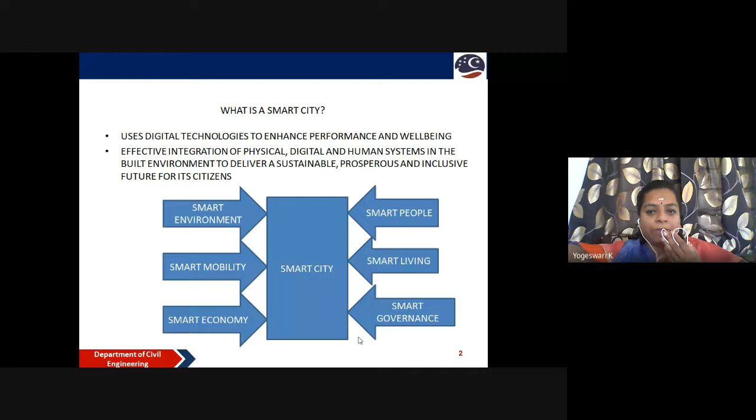Digital becomes very important to use in today's world. Combining this physical, digital and human system in the built environment to deliver a sustainable, prosperous and inclusive future for the citizen - that is when it becomes smart. So a smart city is to have smart people, smart living, smart governance, smart economy, smart mobility and smart environment. With all these things, you can make a city smart.

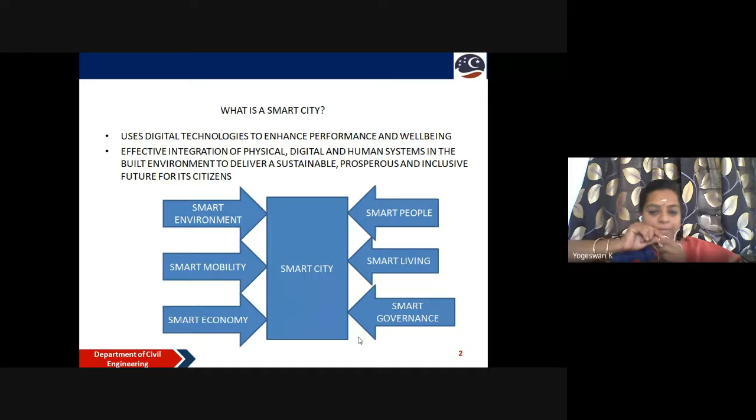So before entering, why do you require smart? Let us see some statistics about India. India's area is around 3.287 million square kilometers, and its population is 1.343 billion. China's area is 9.597 million square kilometers, and its population is 1.410 billion. The USA's area is 9.834 million square kilometers, but its population is only 325 million. So even though China has the number one population in the world, its area is quite large and the population is distributed widely. When you look at the USA, the population is very less compared to the area. But when you look at India, the population is very high compared to the area. That is why India is becoming a smart city.

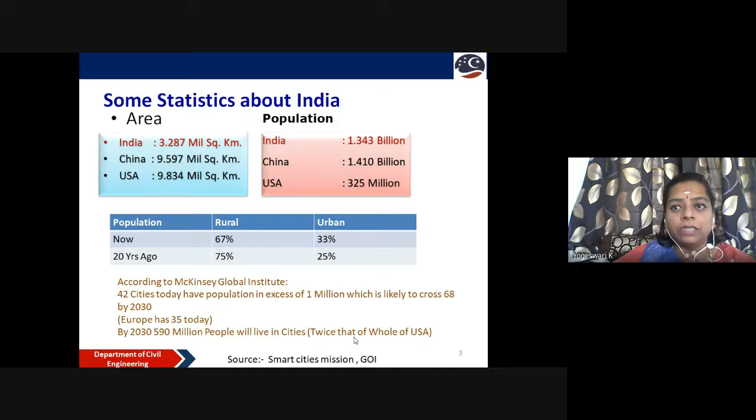But in order to face this challenge, it is very important to think smart. Throughout the world, the rural is also currently converting into urban on its own, by giving more infrastructure to it. So it's not just that people migrate to urban - the upgradation of rural to urban is also happening. A rural place which was a village ten years ago has now become a bigger town. So the upgradation is also happening. Hence it is very important to think smart in supporting people with all types of infrastructure.

So these are all some statistics with respect to water supply, sewage, solid waste, private transportation, rail-based mass transit, and affordable housing, where the basic service demand is very, very high compared to supply.

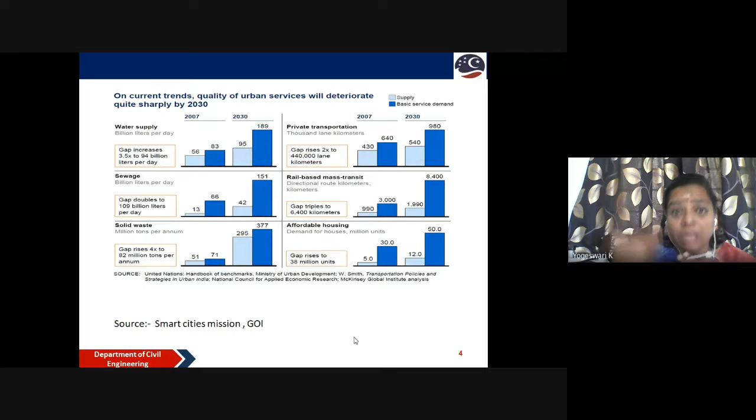We have a very less amount of supply of water supply, sewage, solid waste, but the demand is keep on increasing, and the demand will in future also increase. So for this, we have to design our infrastructure to be very smart.

The objective of Smart City Mission is to promote cities that provide core infrastructure and give a decent quality of life to its citizens, a clean and sustainable environment, and the application of smart solutions. Whenever you want to provide core infrastructure to make a sustainable life, you have to make sure the solution is very smart, and this solution has to be an inclusive development focused on sustainability. So there are two types of smart city mission.

How can you make a city smart? The city has already developed, already grown to a very large extent. In that case, if it is an open area or a new area where the city has to be developed, you can develop it by creating new space, new applications, and all. That is one type. Another type is developing an already developed area step by step.

Another approach is I will not try to make the entire city smart, but any one infrastructure I will make smart. For example, in a commercial hub where I find more traffic, I make smart transportation alone applicable for that particular area.

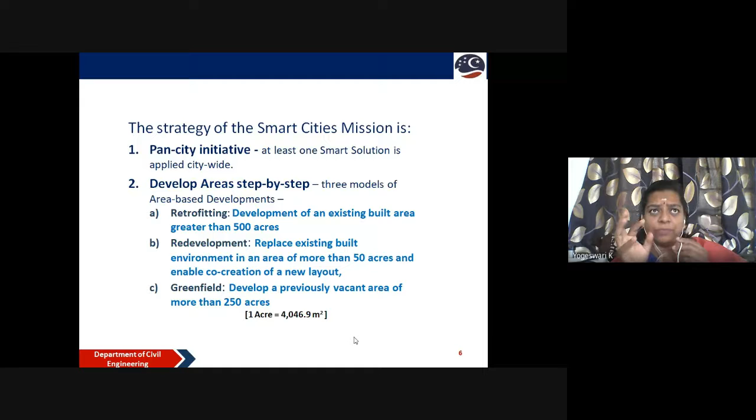So you can make either one infrastructure smart, or make the entire area smart - that is the Pan City Initiative or developing the area step by step. The smart city features include promoting mixed land use in area development. For example, at the lower ground you can have commercial, at the first and second floor level institutional, and at the third and fourth level residential.

Creating walkable localities to reduce congestion, air pollution, and resource depletion, boost the local economy, promote interaction, and ensure security. Today you would have seen many smart cities in this corona period, where people are working from home, using very less transport, so congestion is reduced.

This is possible because of the digital effect we have. Digital has now been implemented in the entire educational system because of this pandemic situation. Because of this, you reduce traffic congestion, and because of reducing congestion, your air is cleaned, there is no pollution in the air, and the usage of petrol and diesel was very less.

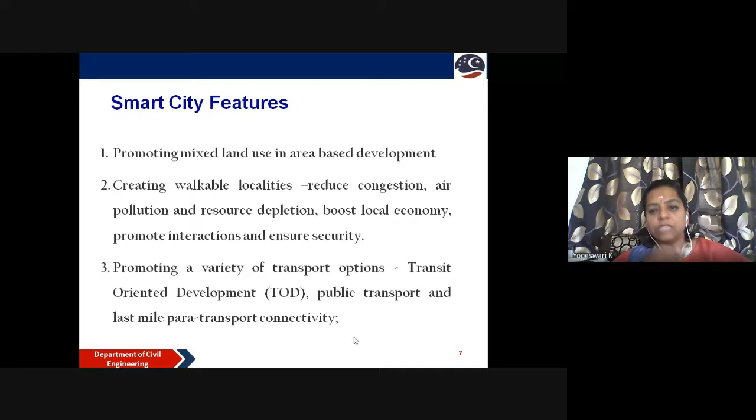So, providing variety of transport options is another important smart city feature, that is transit oriented development, public transport, and para transport connectivity. This is also happening, where even in the transport side, a large amount of smart city features have been taken.

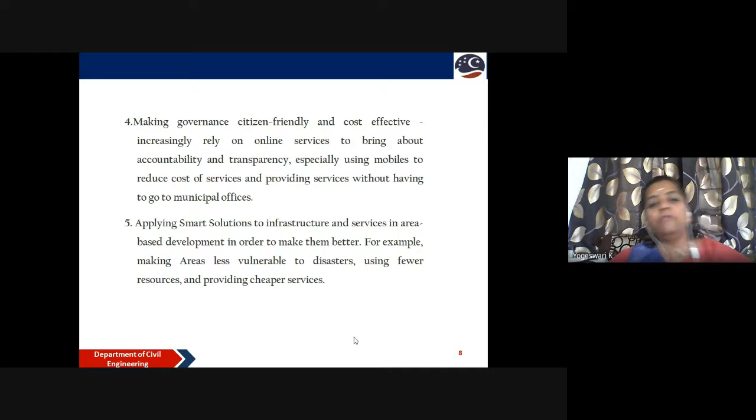And governance - today everything is being done with a mobile. So if your area is not clean, you can just go to your Google app, type your area and find your municipality, and complain online. So it's governance that is cost effective and transparent, using your mobile, without directly going in contact with the municipal office.

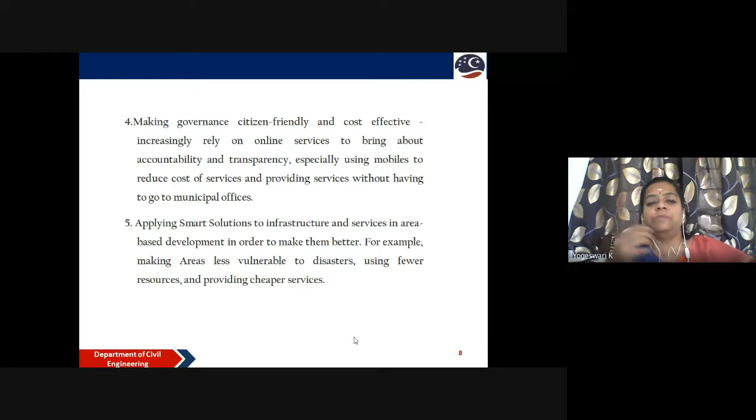You also provide a large amount of smart solutions to infrastructure, services and area based development in order to make them better, for example making areas less vulnerable to disasters. People have been informed previously with forecasting regarding rain, cyclones, or other predictions, given to the public immediately in order to reduce vulnerability, using fewer resources and providing cheaper service.

So what are some pan city smart solutions? We have pan city smart solutions in each and every infrastructure. For example, in e-governance or citizen services, you have public information, grievance redressal, electronic service delivery, citizen engagement, and city eyes and ears. The cameras fitted throughout the cities are called city eyes, fitted with sensors, so you can hear what people speak near that camera - that's city eyes and ears.

Video crime monitoring - nowadays the police, as you would have seen in many newspapers, carry out many investigations using video footage taken in that place. People immediately trace the criminals and then monitor them. If any crime is happening, police personnel also monitor through video surveillance.

Coming to waste management, today waste is no longer just waste - it is usable, reusable material. So waste to energy, waste to fuel, waste to wealth, waste to compost, wastewater to be treated, recycling and reduction - these are some of the solutions in waste management.

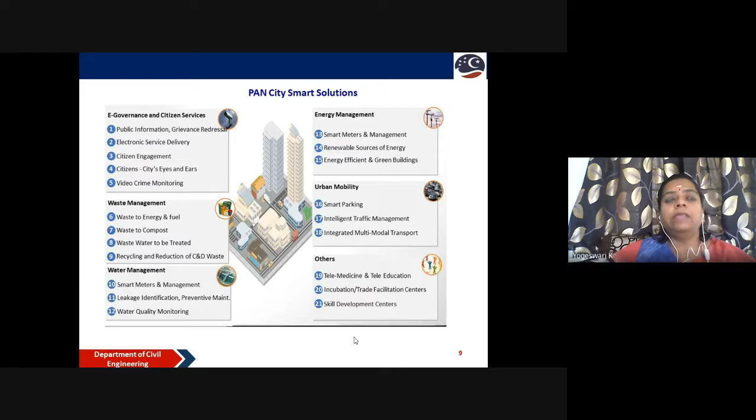In energy management, people use smart meters and manage renewable resources of energy, energy efficient and green buildings. Coming to urban mobility, smart parking, intelligent traffic management, integrated multimodal transport can be used - these are some smart solutions.

And today, the most important are telemedicine, tele-education, incubation centers, skill development centers - these are other pan city smart solutions. So in pan city, you can either take e-governance for a particular area and try to make everything digital, or take water management or waste management alone, transport alone, or energy management alone to be smart in that area.

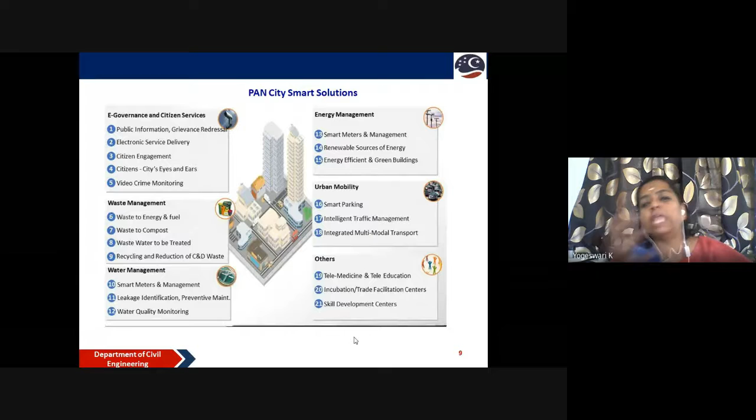So you can choose any one of these infrastructures and apply it to that area. There are 6 key elements to be created as part of smart infrastructure.

In order to make a city smart, there are certain things which are very important to be done. These are the key elements required for making a particular smart infrastructure. The first is the smart city operation center, a control command center which controls and commands the entire smart infrastructure of your city.

You should have a very good Wi-Fi condition. Environmental sensors are required. You need a PA system for announcements, an emergency box setup for getting input data, and a variable messaging system where you can broadcast informative messages and give alerts and city updates. So these are the 6 important elements required: command control center, Wi-Fi spots, environmental sensor, PA system, emergency box, and variable messaging.

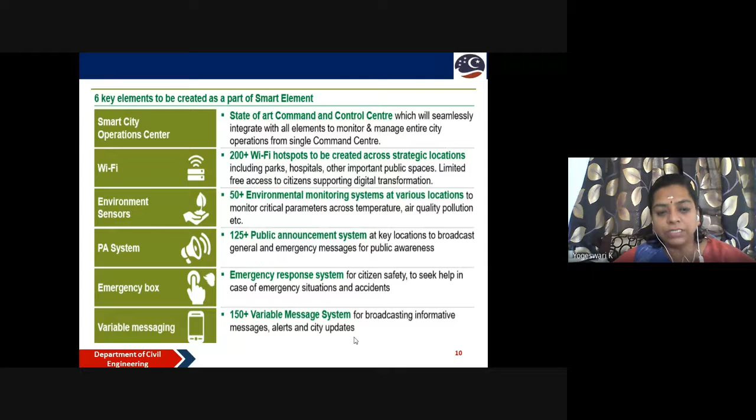Now let us see some smart city, smart pan city initiatives. For example, if I want to create an emergency response system: there is some accident happening, there is a flood related issue going to cross the bridge portion, heavy flood coming in crossing the bridge, or there is heavy traffic happening in a particular area.

Or the pollution level is getting high. For example, in Delhi during January or February, there is a huge amount of air pollution, fog, and mist formation, so people are requested not to come out of their houses or even open their doors and windows. This can be predicted by the environmental sensor and immediately given to the people through the variable messaging text method, so people try to stay back at home.

These are some of the sensors used for the emergency response system: the environmental sensor, the flood detection sensor, the traffic sensor, and the CCTV camera, in order to identify any emergency. For example, if there is an accident, and there is footage coverage, then immediately that sensor attached to it will respond, giving information to the ambulance which is at a very near spot to come.

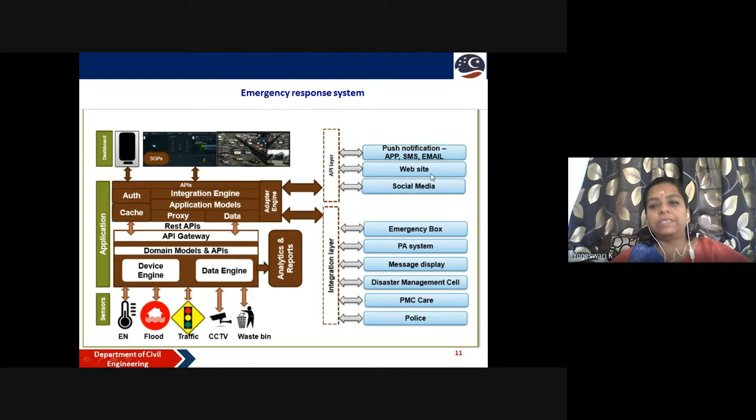This is what is very important in smart infrastructure. For example, once the sensor identifies something, it is taken care of by either police, PMC care, or disaster management. Then immediately it goes to the message display, the PA system, and the emergency box to announce. Then, during the live session itself or after completion, it is given to social media, websites, and finally to SMS or email through the various API layers.

Coming to smart traffic management systems, the various highlights include license plate number detection, which is very important. Suppose a particular vehicle crosses the signal, deviating from it; there will be a sensor fitted to the signal which takes a photo of the number plate. It will immediately detect who is the owner of the vehicle, their address, and all that information, then send a message to the detected person.

So you can have license plate detection to identify stolen or suspected vehicles. Nowadays many stolen vehicles are identified through camera footage. Sometimes they suspect a vehicle and certain sensors identify the goods inside. There's also over-speed detection up to 150 kilometers per hour happening in many places in India. When you cross a particular signal or road, a sensor detects and tells you if you are moving at a speed of more than 150 kilometers per hour.

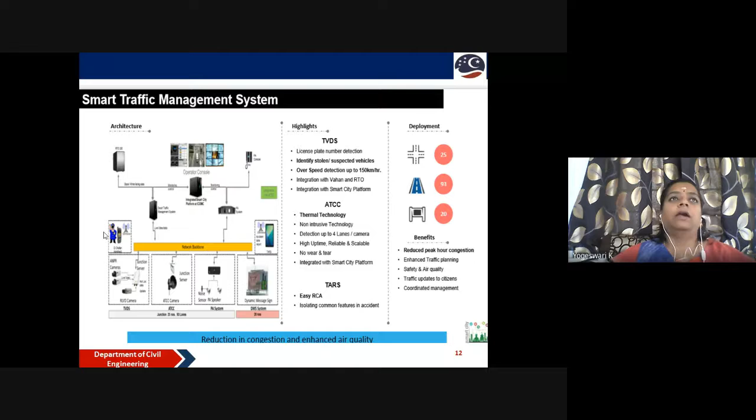Integration with Vahan and RTO. Whenever you buy a vehicle, your vehicle number, registration, everything has to be related to the regional transport office, and this RTO will give you the entire information. So there should be a link between your Vahan and the RTO system, which is being integrated during the purchase of your vehicle itself.

This is done because of smart traffic management and integration with the smart city platform. So you require the entire movement of the vehicle, where it is moving, where it is going, and identify those vehicles, and whether there is more vehicle coming to a particular road, so whether there is a need for change in the signals. Everything can be managed in the smart management system.

ATCC is the Advanced Traffic Control System, where you have thermal technology, non-intrusive technology, detection up to 4 lanes, and camera. So you can find out what is coming in all the 4 lanes, and it is highly reliable and scalable. There is no wear and tear of these sensors integrated with the smart city platform. These are some of the smart benefits of this.

So you take an input in terms of camera, you take an input in terms of the advanced traffic controller system, and you take input in terms of the smart sensor or a dynamic message display. Once you do your analysis, you finally give it out as messages, or display it on the screen, or it can be given to the public.

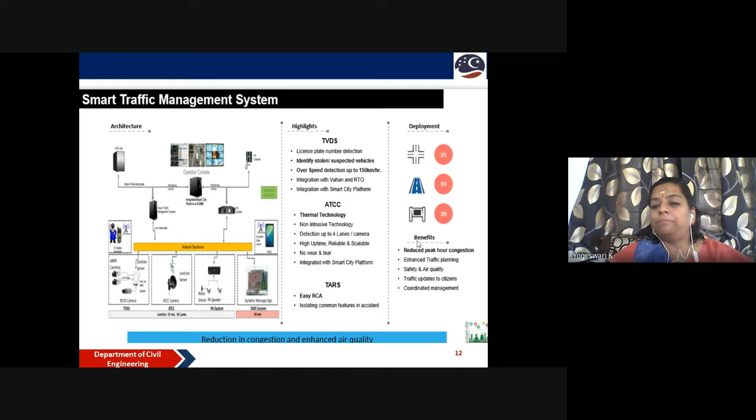So the various benefits are: you reduce peak hour congestion, enhance traffic planning, safety and air quality are enhanced, traffic updates are given to the citizens, and coordinated management is done. Smart traffic management system, this is also happening today.

And if you go to your municipality, like one of my students did this smart tracking management system. What she did is she fit a sensor in the dustbin. So once the dustbin is filled up, it will give an intimation to the municipal office that in this particular road, this particular number of dustbin is filled, and immediately from the municipal office it will give the message to the lorry drivers or truck drivers.

It will say who is nearest on that route, giving information and spot details in order to clear that waste dustbin. So all this information is done digitally without any manual intervention. The sensor identifies there is filling in the dustbin, and immediately it goes to the municipality, finding out who is nearest using GIS technology.

It finds out where the nearest truck is available, and from that truck it gives the information to the driver to go and pick it up, and then it is solved. So the entire thing is being done digitally.

This can also be done for any tracking. You can track any type of vehicle like ambulance, fire service, buses, anything. So AVL tracking and scheduling can be done, and incident management, harsh braking, route violation, speed violation, or a panic button can be handled.

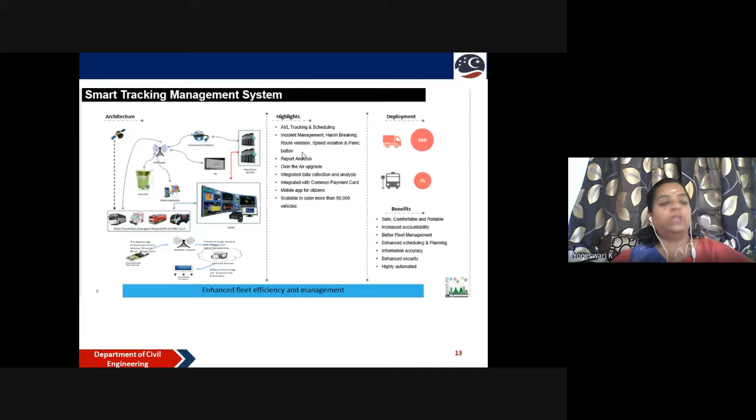So you pay everything in terms of payment, you pay fines using a card. Once the message is sent to the people, they have to immediately pay the fine using the digital card. It also gives various benefits: comfortable and reliable, increased accountability, better fleet management, enhanced scheduling and planning, information accuracy, enhanced security, and highly automated.

Coming to the smart parking management system, you would have experienced this on your own when you go to the various malls. Before getting into a big mall, you will be asked to go to A2, that is A block second floor, or C block third floor. Likewise, you have been given a particular place, so your parking space, once you enter into a parking lot itself, is fixed.

So you don't waste your time finding the parking lot, you just go to your allotted lot and park your vehicle. This can be done, and at the same time the cost required for parking is also managed. The time of parking when you move out, the total parking time you took, you are being charged accordingly.

So all this is done using sensors. The sensor will try to pick out the vehicle and allot a space, and at the same time it will also give all the other information. It is a maximum wireless system, supports all weather conditions, fully automated parking areas, real-time parking availability, and advanced information and guidance is provided.

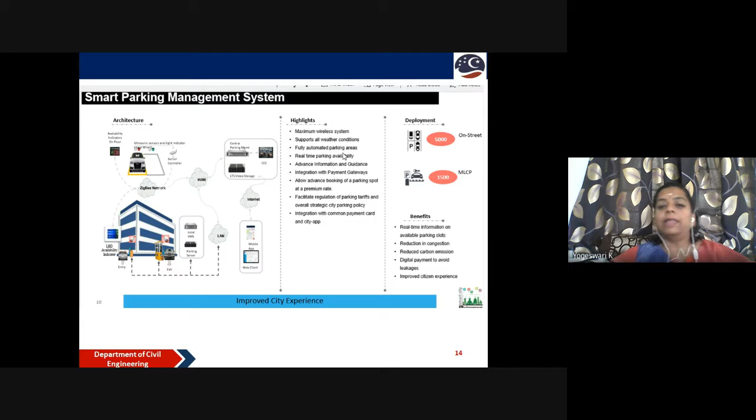Integration with the payment gateway allows advance booking of a parking lot at a premium rate, facilitating regulation of parking tariffs and overall strategic city parking policy, with integration with common payment cards and the city app. The benefits include real-time information about parking slots, reduction in congestion, reduced carbon emission, digital payment to avoid leakages, and improved citizen experience.

Now we will see the area-based development. So till now I have shown this.

Yes, yes. Can you able to hear me? Any queries? Is there any queries? Can I proceed? Okay.

Now, till now I have spoken to you regarding the Pan City initiative. Now I will be speaking about the entire area-based development master plan. So how can I make this? If you go for Pan City, I concentrate only on one particular infrastructure alone, and I try to implement that infrastructure alone to make it digital using digital knowledge.

But when going for the entire area-based development, I have to integrate many infrastructures with a single data unit, that is, the data is one. The population in that area is the same. I don't want to repeat that for each and every infrastructure.

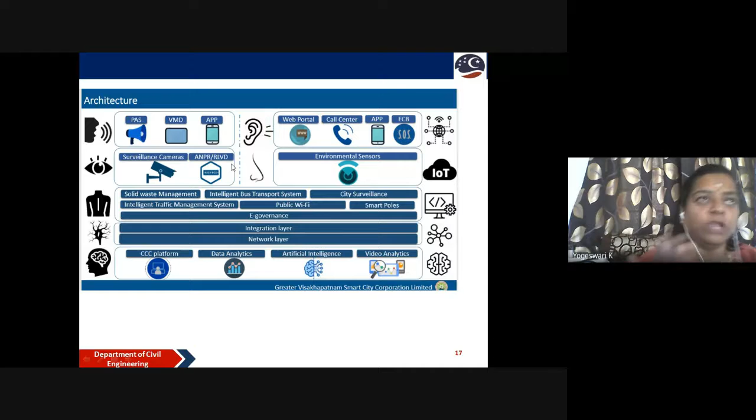Once you've done this with the 4 inputs required for your body, you take input through either voice, ears, eyes, or nose, and then put it into your body. Your body is your infrastructure. As far as the city is concerned, you put it into solid waste management or intelligent bus transport, city surveillance, traffic system, public Wi-Fi, and smart pole. Your nervous system or blood vessels act as an integration layer.

It takes the data and sends it to every point - to lungs, to heart, to your stomach. Similarly, the data goes to solid waste management, intelligent transport system, or intelligent traffic system. And finally, your brain is your control command center.

Your control command center controls the entire platform, gets the data analysis, applies artificial intelligence, works out solutions for any problem, and gives out analytics. So these are the basic architecture elements required for any smart city.

In a smart city, you require cloud sources or IoT, Internet of Things. You require digital knowledge, neural networks, and artificial intelligence. These are the various technologies required for any infrastructure upgrade. So it is no longer true that a civil engineer is just a civil engineer thinking of physical infrastructure alone. It is very important for a civil engineer to enhance his knowledge in digital IoT technique also.

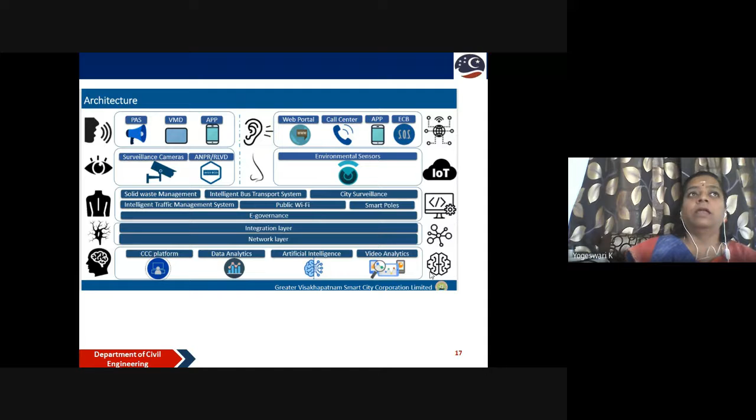As a civil engineer, I would request all students to enhance their knowledge in digital-based civil engineering also. Coming to this, one of the important multi-utility platforms - now I will show you some case studies where they have enhanced the smart city.

This is called a smart pole. When you look at this pole, you can see various elements attached to a single pole. There is a telecom antenna which receives the signal for all your mobiles. You can see a street light, called an LED light, for energy efficiency. You can see a camera here, used for a Wi-Fi spot.

So Wi-Fi spots for a digital city. There are cameras used for surveillance, and some advertisement boards which display or give messages to the people. There is a public address system, PAS system, for connectivity of the city. There are environmental sensors fitted to this pole in order to find out the pollution level, air quality level, and all those things.

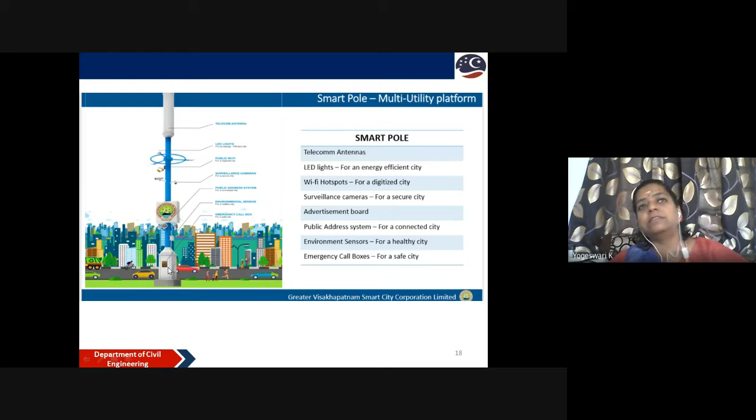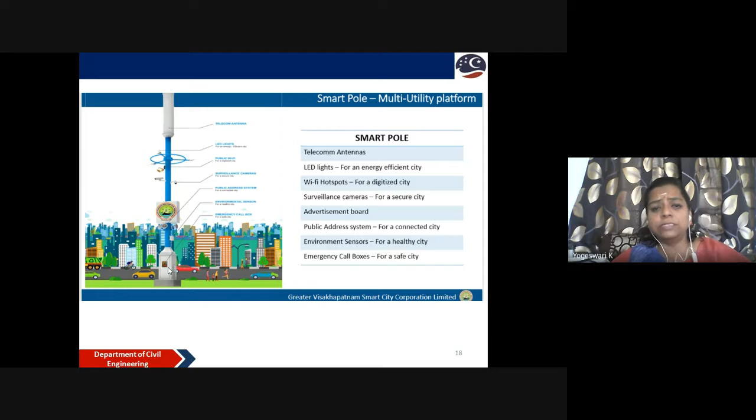And there is an emergency call box for safety. For example, if there is an accident, people just come and press that button and say there is an accident. Immediately the sensor will identify the data and send it to the nearest ambulance, making the ambulance come to the spot quickly. So you can see this is a closer view of the smart pole, where the environmental sensor is fitted.

So it is a real-time pollution monitoring system which gives the temperature, humidity, lux index, noise level, and all those things. You can monitor the carbon dioxide, nitrogen dioxide, sulfur dioxide levels, and also find real-time dissemination to the citizen. In future, it is scalable for PAN City, extended to the waterlogging sensor, real-time correlation, and open data platform.

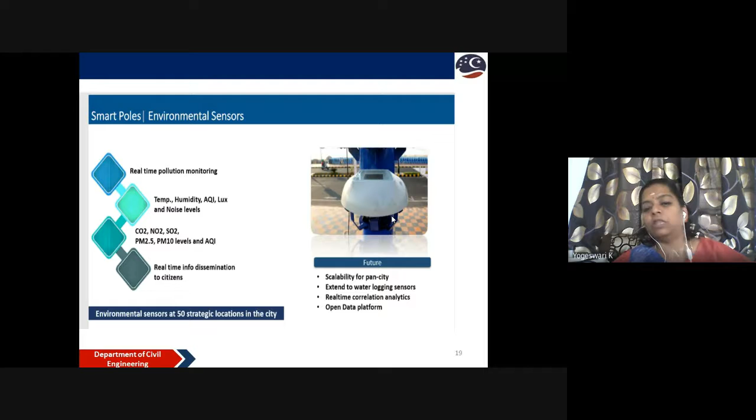So the smart poles have a public address system on all four sides, where you deliver a pre-recorded message to address the people as a whole. Nowadays, during the Corona period, in a commercial hub you can see police using this public address system to tell people not to move in a close manner.

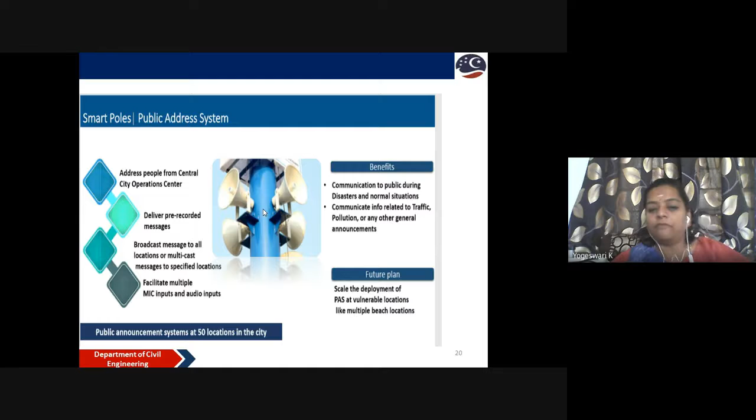For example, there is a person walking on the road who has been given a dog bite. A dog has bitten him. So there are three options for him: either he can dial directly to the contact center from his mobile, or he can use the SOS mobile app, where he just clicks and says he is in an emergency situation.

Or he can call from that emergency call box if he is very close to the road and there is a smart pole with an emergency call box - even if he doesn't have his mobile at that time, he can click the emergency call box. Immediately it will connect to the call taker, who will register his details and complaints - where he is, what happened to him, everything.

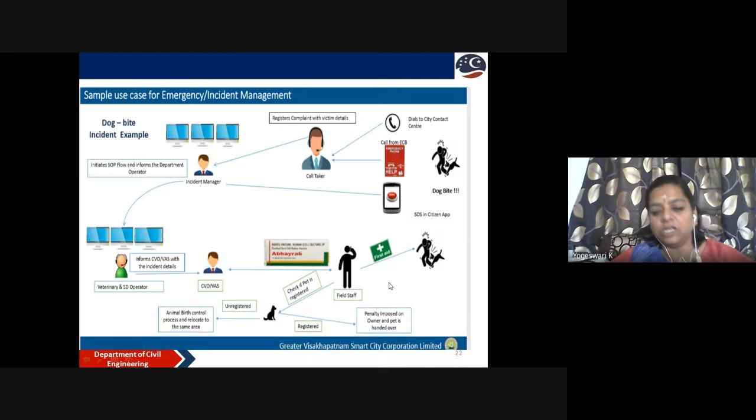So the people can also be contacted. The man and the dog are not moving from the place, they are still in the same place, but other things are happening around them, and immediately a solution is given. This is a simple case for emergency and incident management. You can feel now that your city becomes smart without anybody's help, automatically you get your solution for that.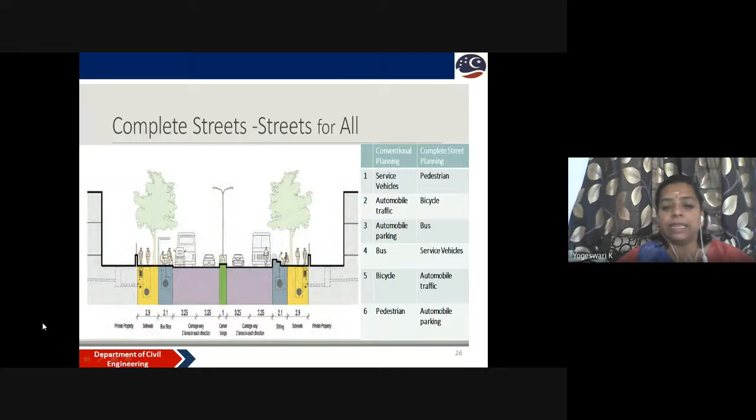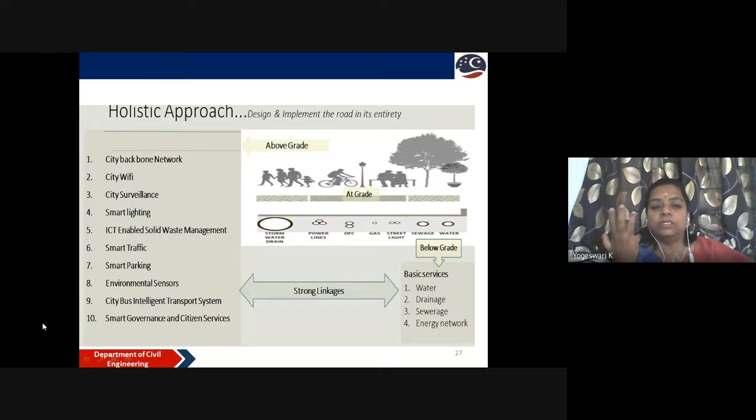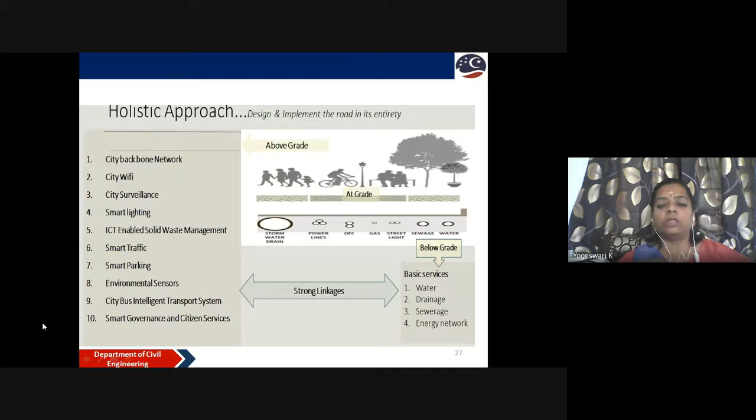Below the street, you can see there is a stormwater drain, a sewage line, an electricity line - all of these require a place. So a holistic approach is required, needing a city backbone network, city Wi-Fi, city surveillance, smart lighting, ICT-enabled solid waste management, smart traffic, smart parking, environmental sensors, city bus intelligent transport system, and smart governance. Everything has to be provided on a particular road, along with basic services like water, drainage, sewage, and the energy network below the roads.

Various design elements are required: smart street furniture and signage, public utilities, bays and on-street parking, smart street poles, median and its beautification, barrier-free and uniform footpath and bicycle lanes, road signage, street vending, carriageway, and utility ducts.

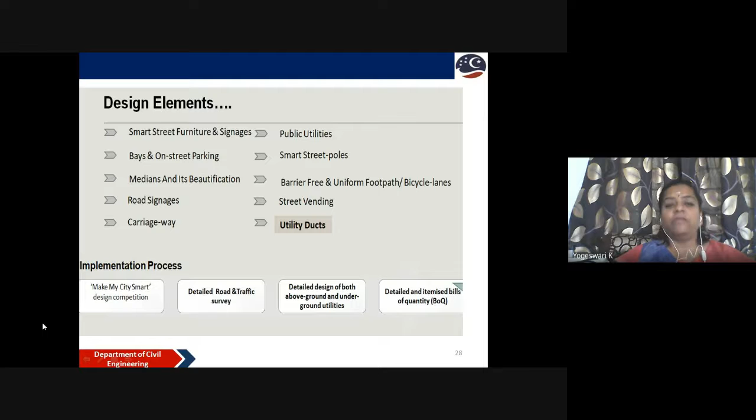So you can see underground utilities on the roadbed, adjacent to the roadbed on either side, and utilities in an underground corridor. When you go to Ahmedabad's GIFT City, you will find the third option, where there is an underground tunnel running throughout the city carrying all the utilities. This tunnel can be entered from various points in that area.

Normally in our places, we go for option 2, where utilities are provided on either side of the roadbed. In some places, where there is no space on either side, utilities are provided below the roadbed instead. There are various advantages and disadvantages in both cases.

In case of utilities in the roadbed itself, disadvantages include repairs cause disruption to traffic during repair. The advantages are that it can be done with very less space and reduces construction time.

Option two, utility adjacent to the roadbed, prevents closure of the traffic lane during construction and repair, requires less protection, and reduces the need to acquire land for future expansion. The disadvantage is more space requirement and loss of pedestrian area during repair.

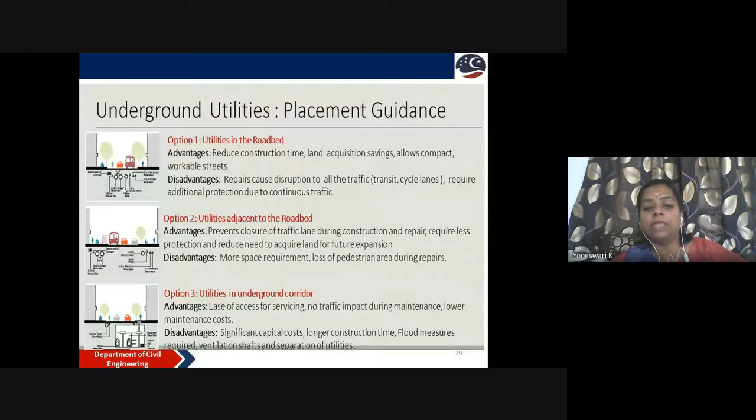So you can see a duct is provided below the road surface, and here you can see various pipelines used for certain things. There are dry ducts and wet ducts. Wet ducts are used for the movement of water supply and sewage. Dry ducts are used for cable lines, OFC, telecommunication lines, and so on.

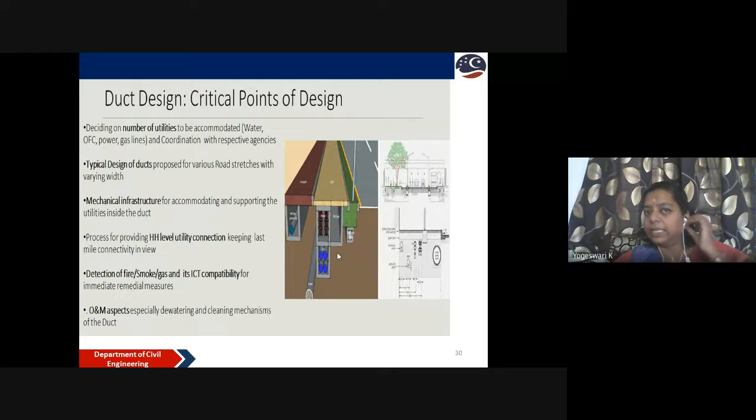There are certain guidelines, rules, and standards available in the National Urban Transport Guideline, UDPFI guidelines, and Code of Practice for Urban Roads, which in today's scenario need to be implemented to make the street smart.

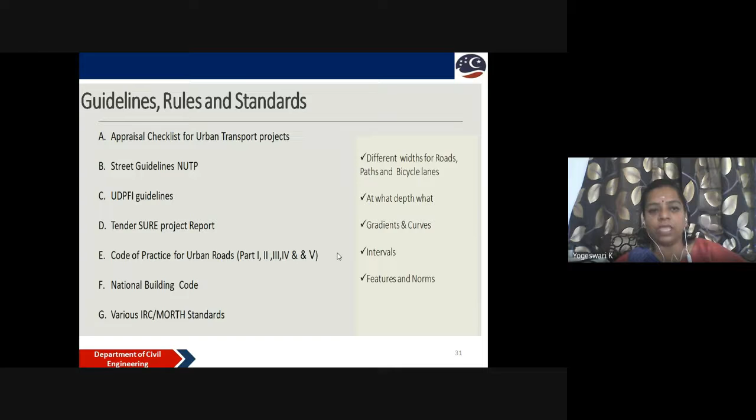Now I will tell you about the future, which is very important. Today you would have seen the crematorium, where for a particular area you will have only one single crematorium. But when you look at the population today, the people at the age of 30 to 50 are the major population in India, while the 60 plus population and the young population are both relatively less.

Otherwise, you have to wait in queue, as during the pandemic situation itself, you would have heard of many cases where in many crematoriums there was a long queue waiting for the deaths to be cremated.

So it is very important to make your crematorium very modern, more eco-friendly, and more usable by people. You require design modules for construction, and all this entity also has to be made digital - who is being cremated, what happened, how he died - all this information has to be given digitally, because the death certificate will not be given by hand; it will go directly from the crematorium to the office, and from the municipal office people can get it through the digital mode itself.

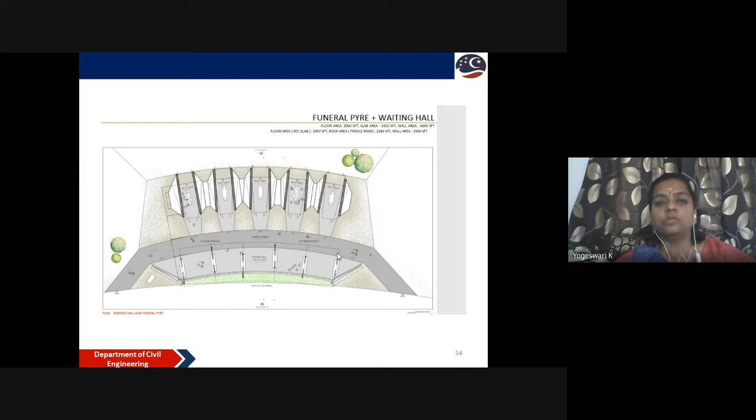At a time you can have some 5 people at this place. It has to be protected from air, rain, sunlight, everything. At the same time, you require a large amount of heat, large amount of fire, and this place has to give self-respect to the individual. You require to keep that place more safe.

In future, you can see there is only a single child for a father and mother. Once they get married to another single child, in a family the husband and wife will have 2 fathers and 2 mothers, one each for husband and wife. So there will be very few people, because the relationships are reduced.

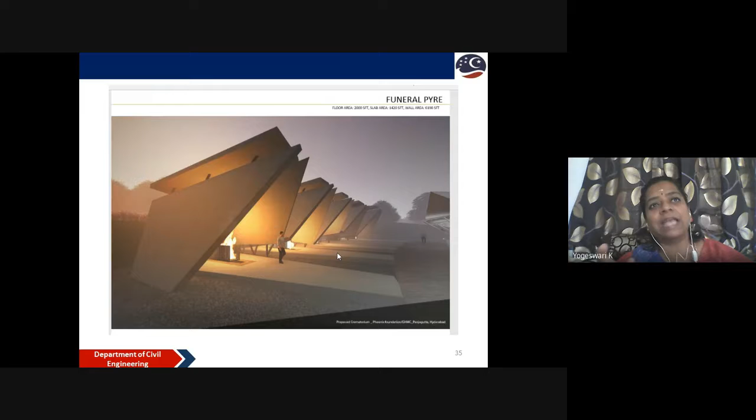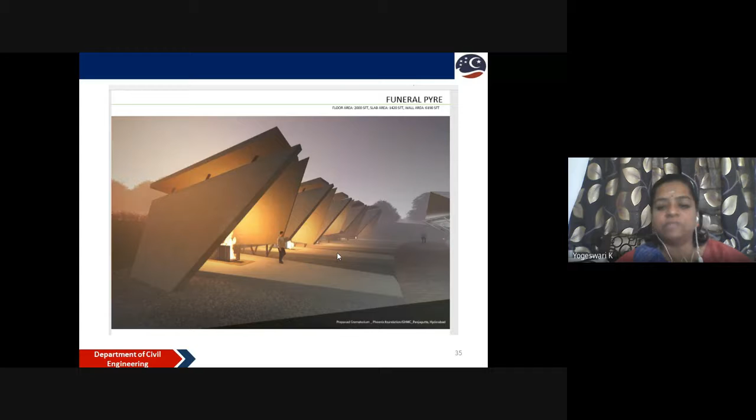There will be very few people who will be coming to the crematorium directly to give the last respect for their loved ones. So you require to give a smarter place for them in order to make a safe journey for the last journey. This is also a very important structure which you have to try to design digitally.

You have to book it in advance, which particular place and when you are trying to do it, what is the time requirement. All these things have to be done digitally, so the space requirement and the utility requirement are also very important.

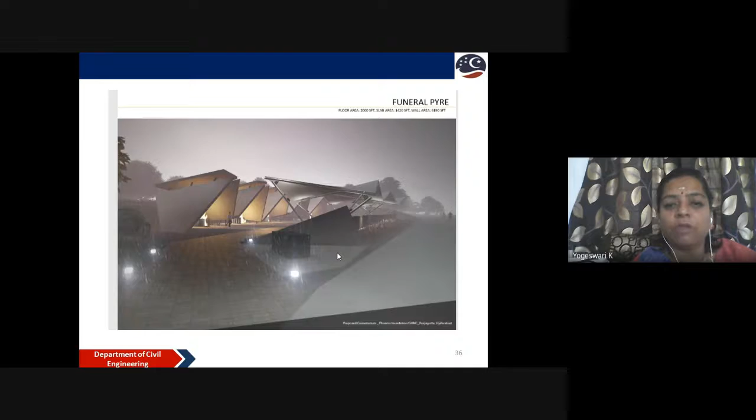Some of the riverfront developments, there are many rivers in India. As a quick view I will show the photos alone. The rivers are no more considered as rivers alone, they have also become a place of recreation. Many parks have been created around the rivers. You can see some of the riverfront elements. These are the action plans.

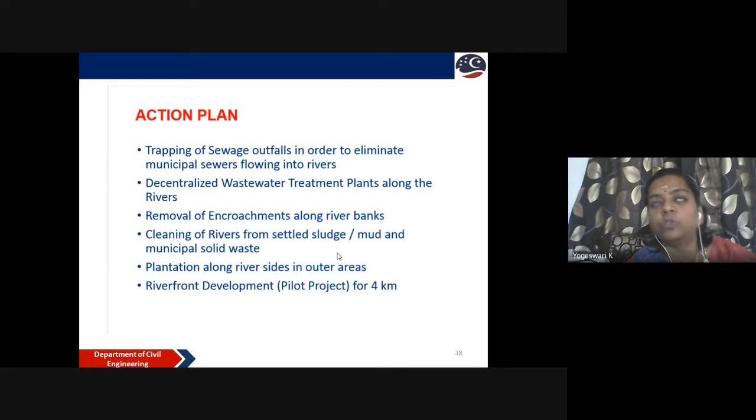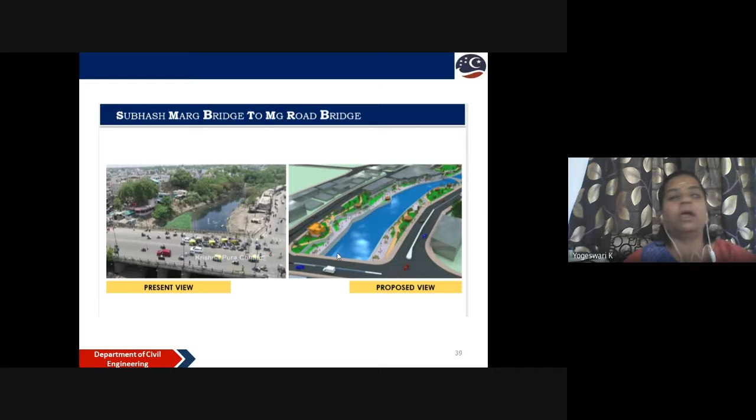You require trapping of sewage outfall, decentralized wastewater treatment plants, removal of encroachment along the river banks, cleaning the river, plantation has been done, and riverfront development has been done. This is the picture of Subhash Marg Bridge, previously and after the proposed view, it will be looking like this.

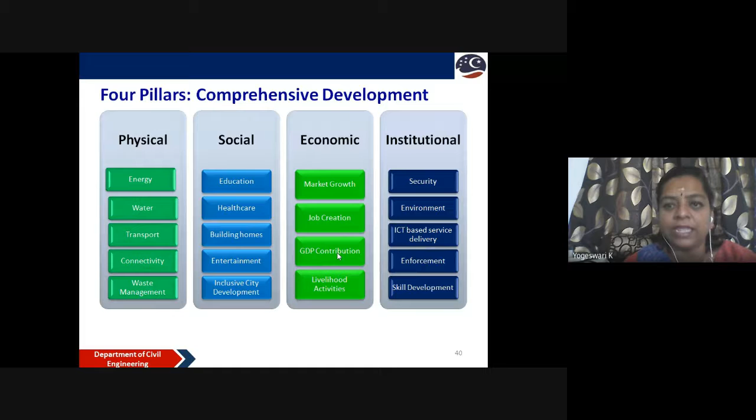So these are the things. When you look at comprehensive development, the four pillars of smart city are physical, social, economical, and institutional. In physical, you have energy, water, transport, connectivity, and waste management. In social, it should be educational, healthcare, building homes, entertainment, and inclusive city development. In economic, market growth, job creation, GDP contribution, and livelihood activities. In institutional, security, environment, ICT-based service, enforcement, and skill development.

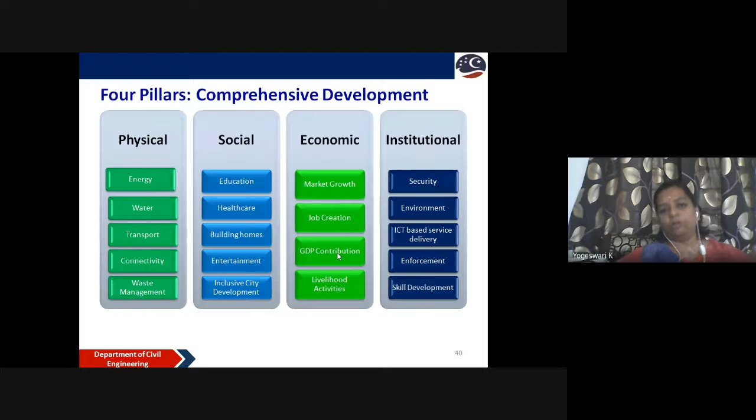It is comprehensive development. You do one work in one physical element, but it will give advantages in social, economic, and institutional areas. If you touch anything in institutional security, it will once again benefit others, so it's all interlinked. If you strengthen a particular pillar, it will also give advantages to the other pillars. So what is smart in these smart cities?

The real smartness is IoT and M2M, that is sensor communication, which requires a standard, safe, secure, accountable, harmonized way to fulfill the dreams and aspirations of its citizens. So it is very...

There seems to be a slight technical error. Please wait. Our guest will rejoin soon. Participants, please wait. Hello.

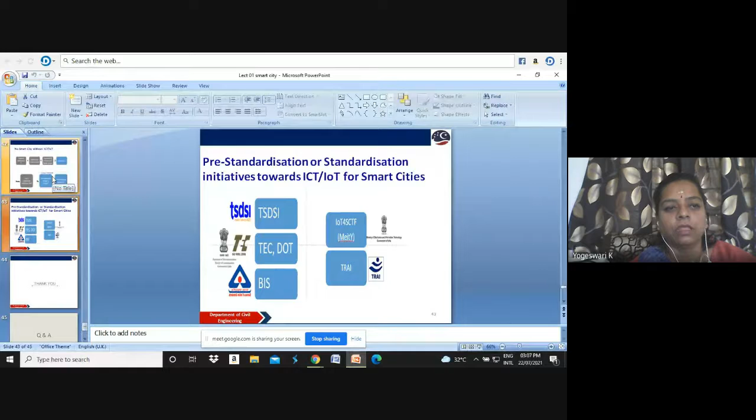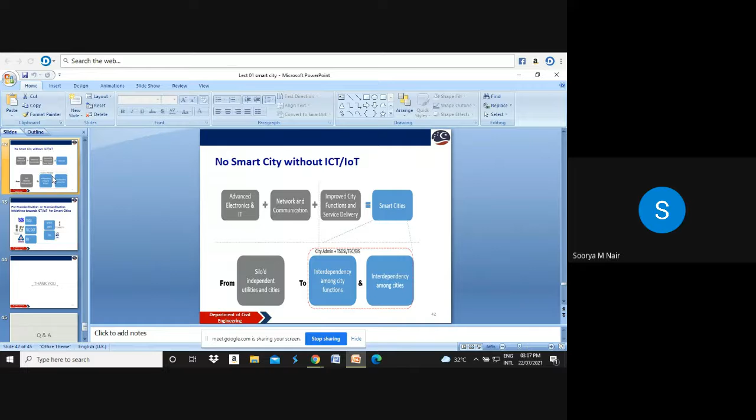Have you seen the slide regarding no smart city without ICT and IoT? Have you seen this? Have you heard the explanation regarding this? No ma'am, just the slide before. This one? What is smart in the smart city?

Yes ma'am, yeah. So the real smartness in the smart city is using IoT and sensor communication in a standardized, safe, secure, accountable, and harmonized way, to fulfill the dreams and aspirations of citizens. So it is very important that you...

Enhance your knowledge as a civil engineer. Please concentrate on the infrastructure additional to the digital knowledge. So it is not purely water supply alone, you have to think smart meter also. It is not purely the traffic alone.

You have to think about the video surveillance also. It is not emergency response alone, the roads alone. You have to think about how to connect each roads. So GIS, integrating yourself with a geographical information system, getting all your network, and you should know how you have to use artificial intelligence, and all those things is very important. So you should also have some digital knowledge.

If you are able to have digital knowledge, what type of sensor, how you can use it, where - for example, if you're constructing a house today, people ask whether the security system is okay there. You require to fit a camera, you require to see where to fit a camera. So as a civil engineer, you should know what type of camera you can fit, what sensors are required for a particular home. So if you are getting into any major infrastructure like water supply, sewage system, or e-governance, whatever, then you have to think out how to make it digital. You have to enhance your knowledge in terms of digital technology also.

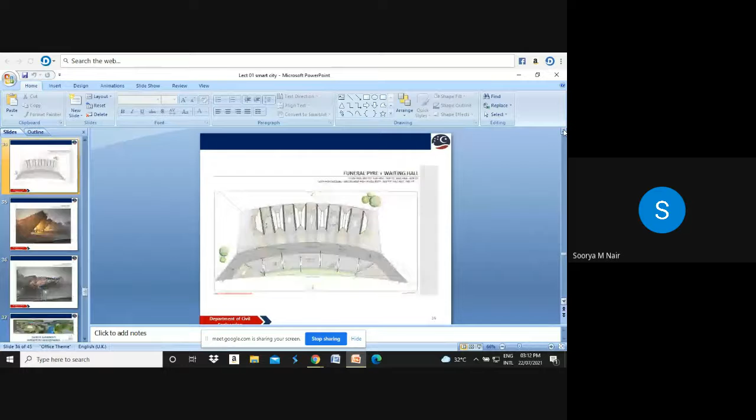Here I have a suggestion - you can add the population density, that will be more clear for people to understand how many people are there per 1 square kilometer. Because with these two values, we know it is much smaller or bigger, that kind of comparison we can do, but when you see the population density it will be more clear. Sure sir, what you are saying is a good point.

Okay, and your lecture was good. Thank you. We have to say that smart cities are not so easily possible, because it has to create some self-awareness among the public, and they have to get involved despite the government enforcing it or technology being enforced. It has to be properly understood. Definitely. Public participation is very, very important in the case of smart cities.

Public awareness is very important, created so that they will participate in that. And to a certain extent, I think this COVID has helped us, because it started helping us rethink about alternate ways of living.